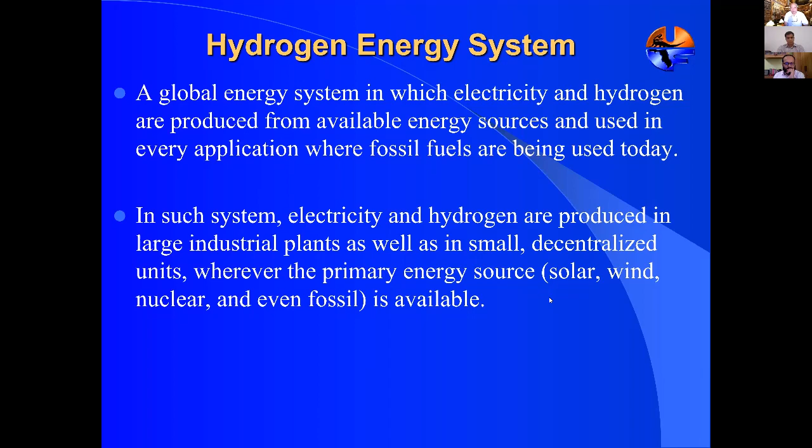Of course, clean hydrogen or green hydrogen is where you would use solar or wind as alternative energy sources to produce hydrogen. Hydrogen is considered to be an energy carrier, not an energy source, and that's an important point to make. This is what essentially a hydrogen energy system looks like.

You produce electricity, you transport electricity from the source to the final destination, and you can also use electricity to electrolyze water to produce hydrogen, and then you can transfer hydrogen in pipelines and use it for all kinds of applications, chemical, industrial, domestic, and so forth. You can also use it for transportation, especially when you are using either compressed hydrogen or liquefied hydrogen in cars and vehicles.

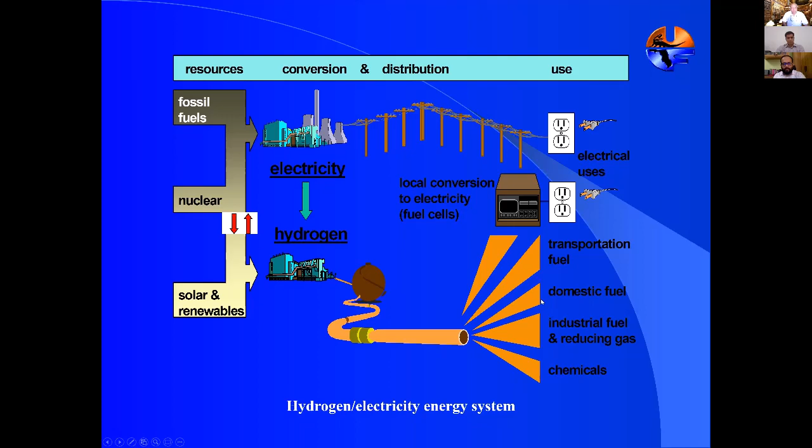In the United States, actually, I am very pleasantly surprised in some ways over the past couple of years to see this big, huge push towards hydrogen. This week happens to be what we call Hydrogen and Fuel Cell Week, which is October 4th through 8th, 2021. So we are in the middle of it.

They actually selected October 8th to be a very special day, because October is the 10th month, and 8, that would give you 1.008, which is the atomic weight of hydrogen. So 10/08 is the date, and 1.008 is the atomic weight of hydrogen. They have selected that to be the Hydrogen and Fuel Cell Day. That's sort of symbolic to celebrate hydrogen and to highlight the role that it plays.

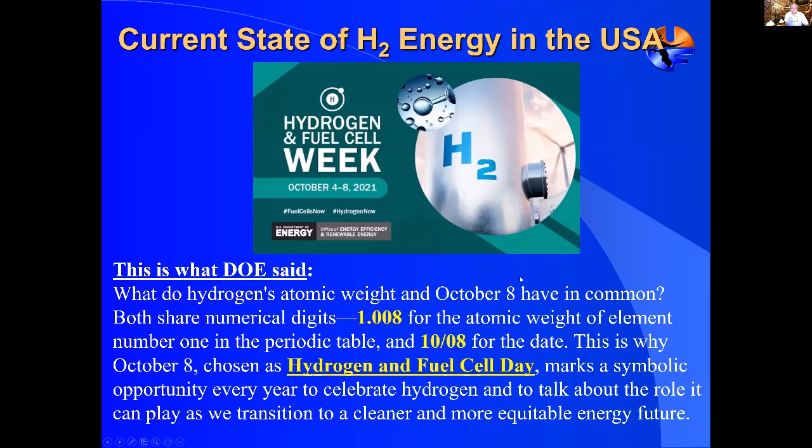So this is good, because this is led by the U.S. Department of Energy, and there is a big move in the U.S. Department of Energy to make hydrogen very important. In fact, I'll give you some small statistics here that go along with my point: we have 10 million metric tons of hydrogen produced annually in the U.S. We have 170 megawatts of electrolyzer capacity. This is being used to produce hydrogen from water.

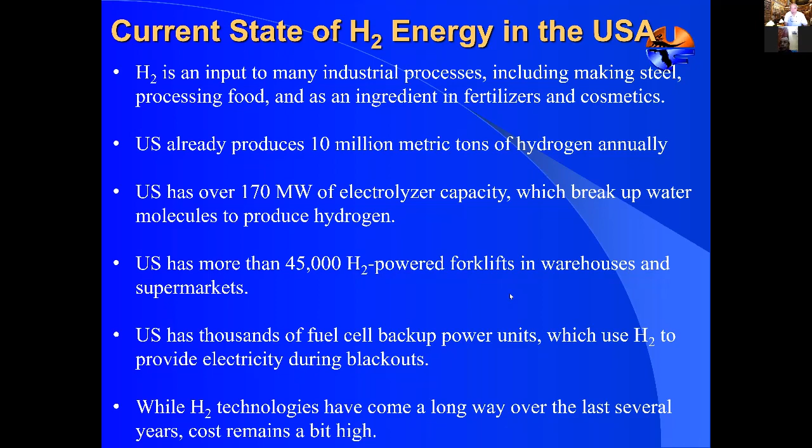45,000 hydrogen-powered forklifts in warehouses and supermarkets, and thousands of fuel cell backup power units that use hydrogen to provide electricity during blackouts. So this is all the good part. The not so good part is that it's still a little too expensive to produce hydrogen. So we're going to talk about that in a little bit, and I'll tell you what the target is for the U.S. Department of Energy.

They also have established a Hydrogen and Fuel Cell Technologies Office, which is a new office established recently. This office essentially coordinates hydrogen activities across the whole Department of Energy. It's working to bridge the gaps in technology, to unlock potential for clean hydrogen, to tackle hard to decarbonize sectors in the U.S. economy, to create job opportunities, to lift up communities, and to help the U.S. meet the climate goals of President Joe Biden.

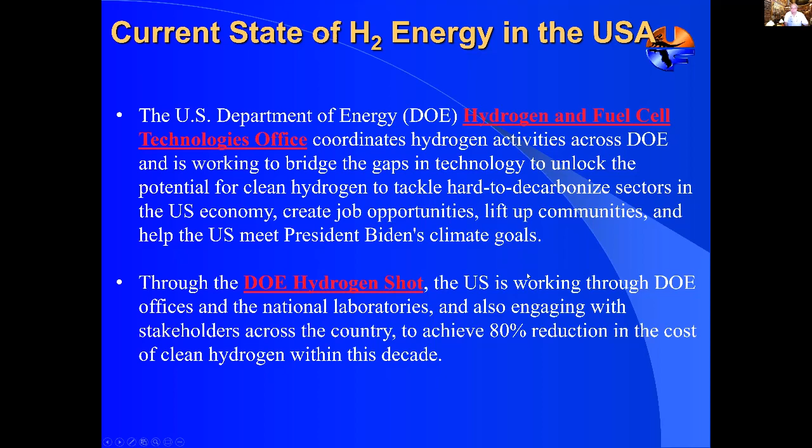Now, the National Renewable Energy Laboratory performed a study regarding medium and heavy duty vehicles. They did a study on the TCO, total cost of ownership, of medium and heavy duty vehicles, including not just hydrogen, but also all other conventional fuels like diesel. The medium and heavy duty vehicles currently account for 24% of the greenhouse emissions from the transportation sector in the United States. Therefore, if we're going to decarbonize the US economy, we're going to have to work on these vehicles because it's almost a quarter of the greenhouse gas emissions.

Now, these vehicles, for good or bad, are heavier and used more heavily than personal cars. On average, you expect commercial Class 8 tractors to travel over 100,000 miles per year. The commercial vehicles are extremely heavy. They can range from 14,000 pounds for the Class 4 delivery vehicles up to 80,000 pounds for the Class 8 delivery vehicles or tractors.

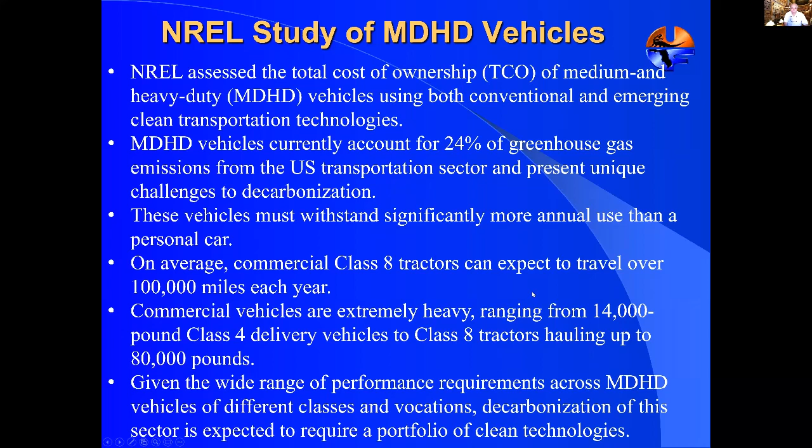The study also described the total cost of ownership of Class 4 and 8 trucks powered by diesel and natural gas and batteries and hybrid batteries and diesel systems, and of course, using hydrogen and fuel cells. They made a prediction of what the technology is going to look like in 2025 and in 2050 when they did this study.

The analysis that they performed was involving stakeholders everywhere, and is really considered the first account to calculate the indirect cost of what they call powertrains, in order to basically provide this information on the different market segments, so that we know how much money we're really dealing with in this particular part of the transportation sector.

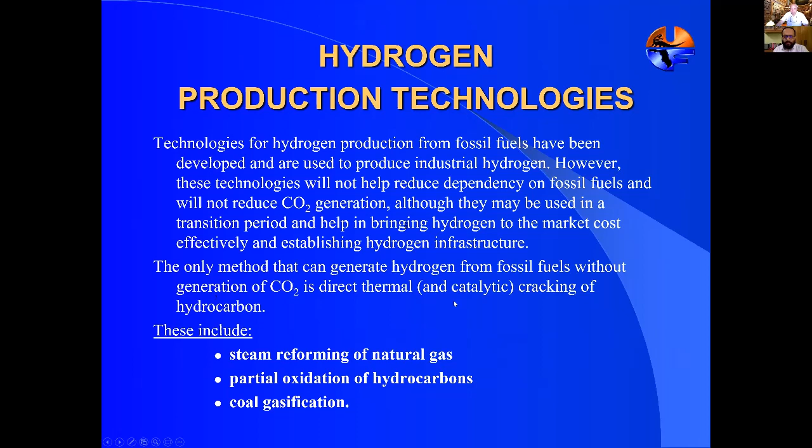So I'm going to stop here. I think this is probably a good stopping point. I have many other slides I can talk to you about, but for now, this would be my presentation, and then we'll hopefully answer your questions at some point.

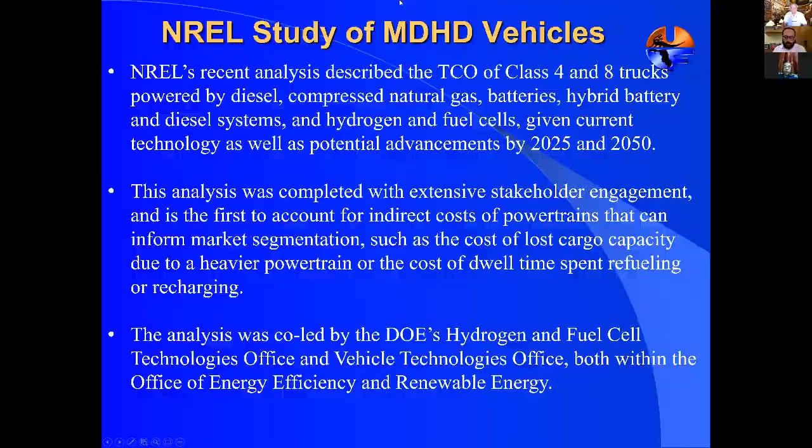Thank you, Dr. Sherif. You've clearly given us a snapshot into the current state of hydrogen energy in the United States, and also shared perspective in terms of how hydrogen is being approached for medium duty and heavy duty vehicles in the United States. I would now like to invite Professor L.M. Das, Dr. L.M. Das, for your initial comments, sir, and your quick presentation.

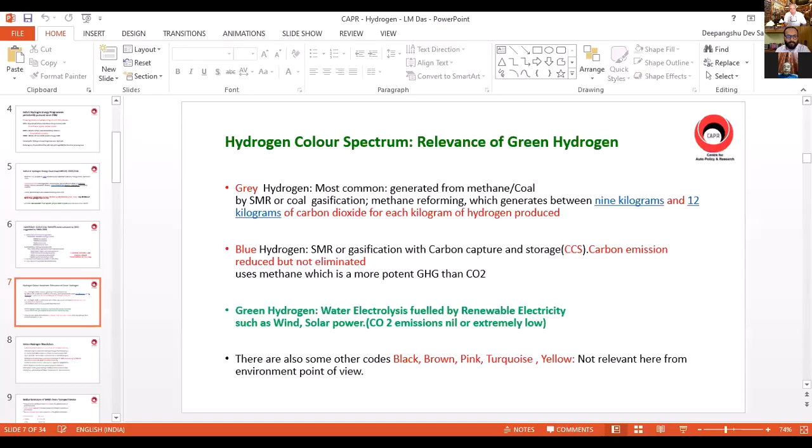I'll be talking about hydrogen, and I'll be talking about the application of hydrogen. Hydrogen is a fuel which is known to us for many years. Next slide, please. No, the other slide, please. It's not a radically new concept.

As you know, the famous science fiction writer, French writer Jules Verne, had also thought of hydrogen more than 150 years ago, from the energy crisis or the fuel starvation point of view. In one of his novels, Mysterious Island, he gives a very lifelike picture: a group of people are going in a ship. Suddenly it appears that there is no fuel to propel the ship further. What do you do? Another person in the ship says, let us derive some power, some energy out of this vast mass of water and propel the ship further.

So that means the visionary had thought of hydrogen as a fuel from the energy crisis or the fuel starvation point of view. The entire dimension of the problem has taken a new turn right now because of environmental degradation. It is usually said, we have not inherited this planet from our ancestors, we have taken it on loan from our future generations. So it is our moral duty to hand over a livable planet to the next generation. And here comes the environmental degradation.

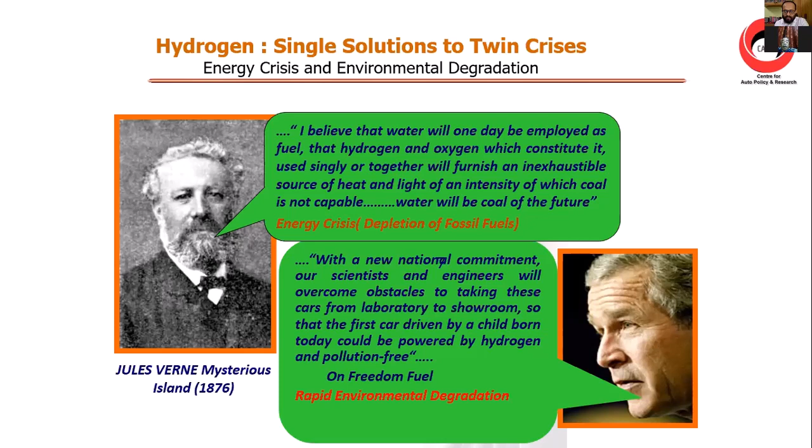George Bush, when he was the president of the United States, declared hydrogen as the freedom fuel. Freedom in the sense of freedom from energy crisis and freedom from the monopoly of the oil producing countries. Next slide, please.

As you know, right now there is an unprecedented global shift towards decarbonization, primarily because a man in the street knows what is global warming, what is greenhouse gas emission, how the ice cap is melting in the polar region. All these things are known to a common man in the street. So it is very important that hydrogen receives the attention it deserves.

There have been many ups and downs. Hydrogen has been tried out several times. Even during the World War days, Germans tried hydrogen very rigorously; they even went up to the technology of hydrogen injected engines, which were destroyed in the bombing. But right now, many countries have developed their goal-oriented, mission-oriented, time-bound plans for hydrogen, what to achieve by what point of time.

There have been many joint programs between several countries on different aspects of hydrogen, and integrated hydrogen systems consist of production, storage, utilization, and all that. And all these things are being tried out. I think these are some common aspects on which I'll not spend much time. The next slide, please.

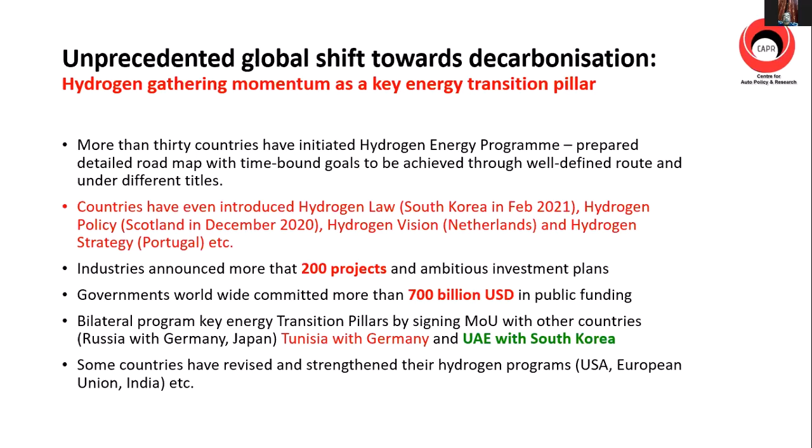India's hydrogen program: India thought of hydrogen much before George Bush talked of the freedom fuel. In 1982, the Department of Non-Conventional Energy Sources, which was a part of the Ministry of Science and Technology, had got the hydrogen program, and they had given a project to IIT Delhi in 1982, in which we tried on some engines initially. Subsequently, the department was graduated to a full-fledged Ministry of Non-Conventional Energy Sources, a unique ministry in the entire world.

And they put a lot of emphasis on hydrogen energy. A roadmap was prepared with people from the oil industries, the automobile industries, academia and the government. Mr. Ratan Tata was involved in the preparation of this map. A very ambitious project was given to the idea of hydrogen being used in the auto sector. Then the Ministry of Non-Conventional Energy Sources changed its name to the Ministry of New and Renewable Energy, where the work is being tried out with a renewed spirit of interest right now. Next slide, please.

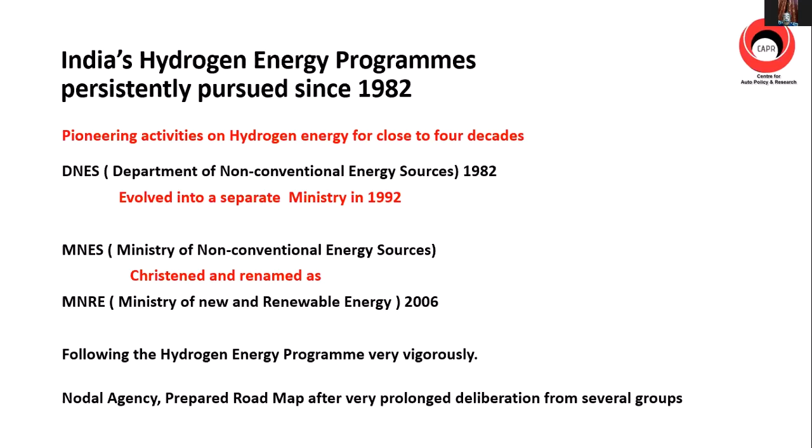So the National Hydrogen Energy Roadmap, as I said, was prepared from 2003 to 2006, with inputs from the oil industry, automobile industry, academic institutes, and the government. A very ambitious roadmap was prepared, which was approved in 2006, and then in 2016 they looked at the map again and revised it. All these are available on the internet, so I need not go into details. What I'm trying to say is that India has been a pioneering country in hydrogen pursuits, the objectives have been ascertained at different points of time, and the goals have been revised.

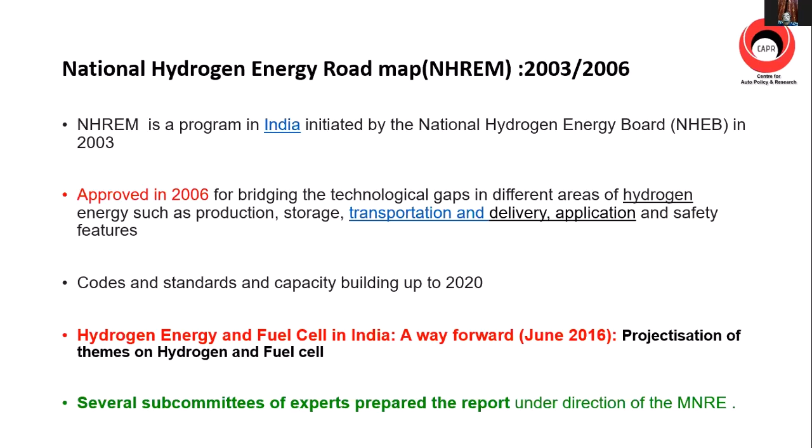And right now, you might have read in the newspaper today, the government has told the oil companies, Indian Oil, BPCL, HPCL, and GAIL, to come forward with a hydrogen production program by the end of this month. This shows the surge of interest in this country to go to an environment-friendly atmosphere for the common man. Next slide, please.

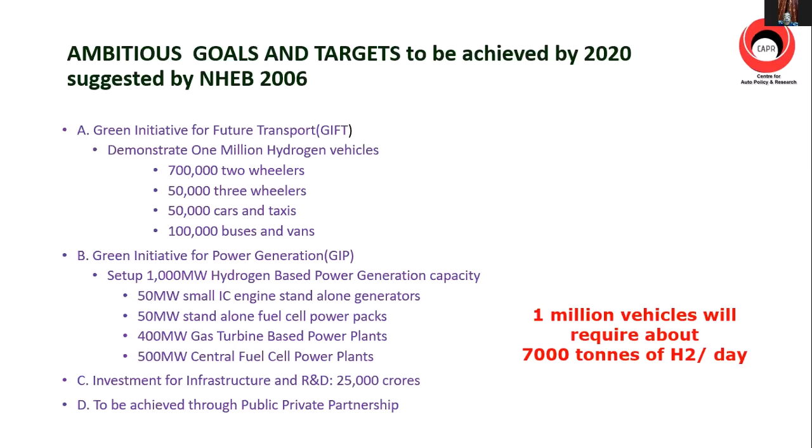So this is a very ambitious goal. I remember at one of the World Hydrogen Energy Conferences where I projected it, there were lots of questions about how India could have 1 million vehicles by 2020. This is the roadmap that was prepared. It is always better to gaze at the stars, to have some apparently unreachable goal, so that you put in your efforts and whatever you achieve will be substantial. And this is what has happened in this country. Next slide, please.

The color spectrum of hydrogen is very important: gray, blue, green, and there are others like pink and yellow. These are all textual information; I'll not go into it. I'd just like to say there's a lot of emphasis on green hydrogen. That means the production of hydrogen should be environmentally compatible. If producing hydrogen is energy intensive and environmentally not compatible, it will not be accepted. So green hydrogen is the present thrust. Next slide, please.

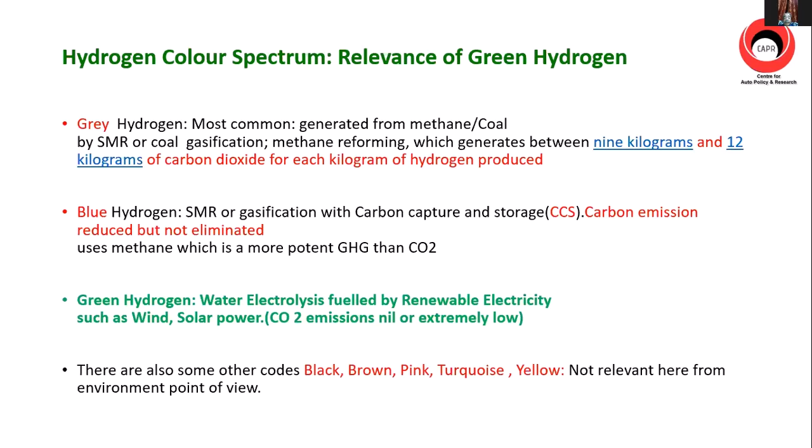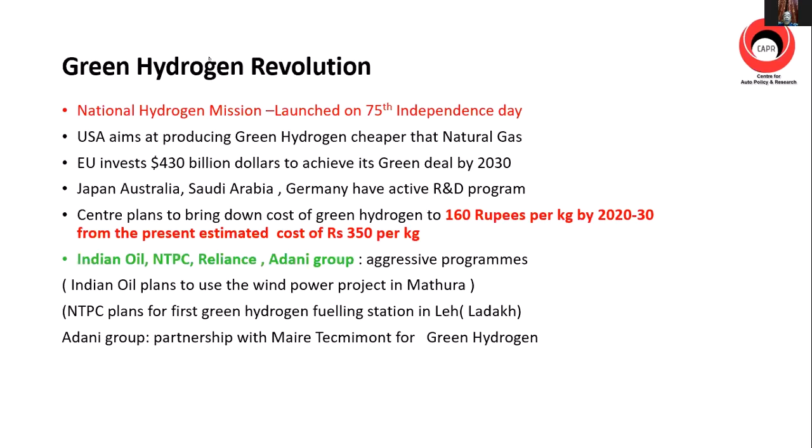So this is the green hydrogen revolution. As I said, many countries have already done this. The US has revised its program, the European Union has gone as a unit, and Japan, Australia, Saudi Arabia have all been trying. Indian Oil plans to use wind power for the Mathura refinery. NTPC has got a very big plan, and the Adani and Ambani groups have too. The unique feature in India right now is that the government, the industry, academia, and the common man are all contributing significantly to the hydrogen energy program. Next slide, please.

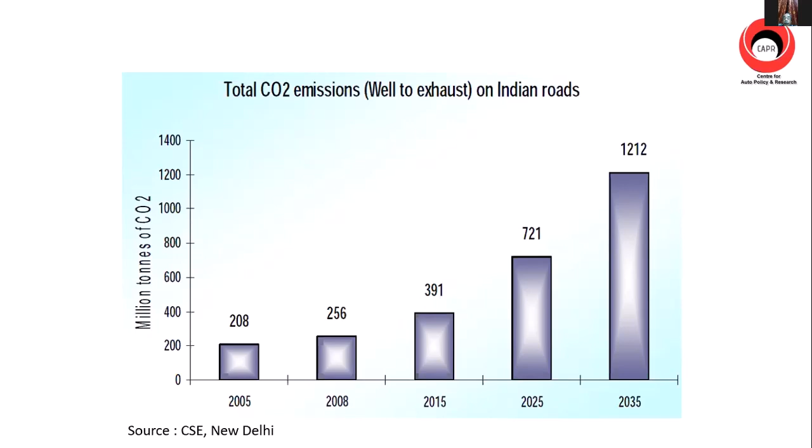Dr. T.N. Veziroglu did a study at the University of Miami, and he showed how hydrogen energy is building up, how fossil fuel energy is diminishing and hydrogen is going up. This is a study which was carried out with lots of practical data and modeling.

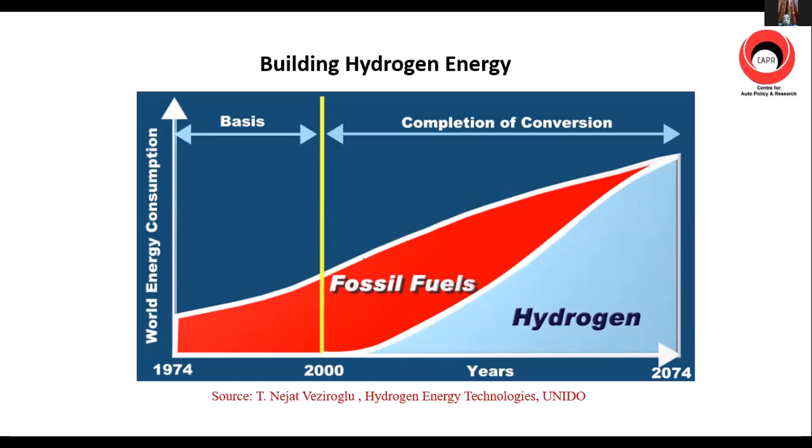Next slide, please. Next slide.

Hydrogen is the alchemist's dream because you get it from water, and upon combustion, it gives out water. It can be derived from literally all sources. You can get it from solar energy, from wind energy, from water, from geothermal, from biomass, literally everything. The technologies are different, obviously. For the production of hydrogen, there is an infinite source potential with an ability to provide almost zero emission.

So this is a broad investigation of engine strategy, which is very important because in the transport sector, the main culprit is the internal combustion engine right now. And internal combustion engines, as all of you are aware, are of two types: spark ignition and compression ignition. So there are several types of studies that have to be made: the performance, the emission, the combustion, the lubrication studies, the endurance test. All these aspects are to be very rigorously investigated before building up an engine for the transport sector. Next slide, please.

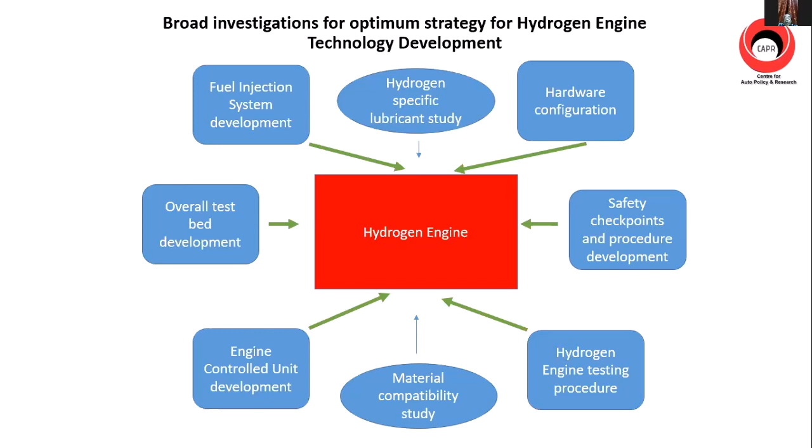Backfire has been the Achilles heel of the hydrogen engine. Because of the low ignition energy and high flame speed, sometimes, if there is a hotspot, a concentrated source of thermal energy, it inadvertently acts like a spark plug, and the flame propagates back into the manifold. And that is precisely why hydrogen energy research could not be continued and got restricted to laboratory curiosity only. And all these positive features of hydrogen were clouded by the single culprit, backfire.

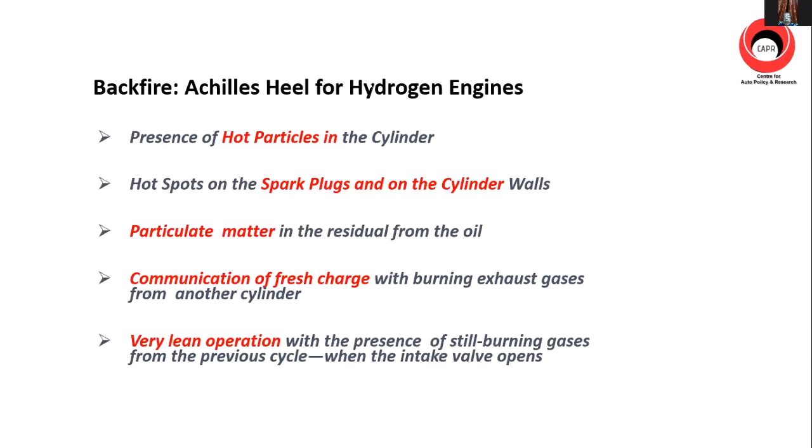But now backfire has been very thoroughly investigated, and the steps to be adopted to get rid of backfire have also been identified. Next slide, please.

We in IIT Delhi carried out long-term work, and the induction of fuel, the introduction of fuel into the hydrogen engine or hydrogen vehicle, is the crux of the technology. You cannot have a carbureted system because backfire will not be eliminated by that. As you know, the hydrogen flame is invisible, it has a very high flame speed, and it needs minimum ignition energy. So once the flame propagates back into the manifold, it ends up in an explosion.

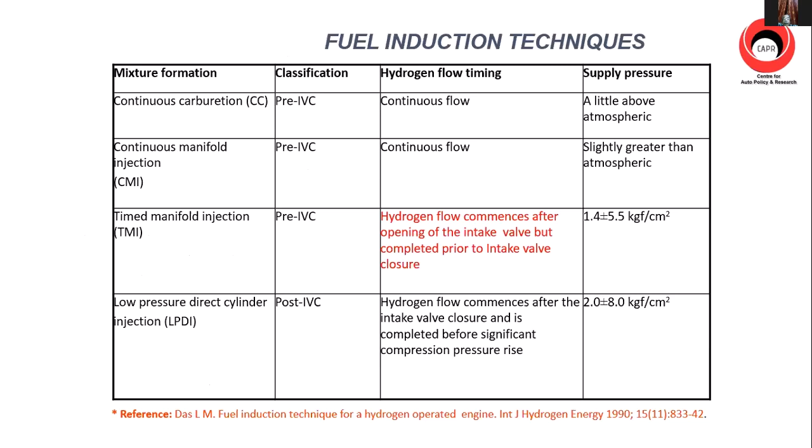At the University of Oklahoma, at one point of time, some projects given by the Department of Energy, United States, were discontinued because they were not able to identify the cause of backfire. In IIT Delhi, we carried out a series. This particular table reflects the work of several years in which how to introduce hydrogen into the engine was finally optimized, and timed manifold injection was important because you introduce hydrogen at a point into the manifold when it doesn't come in contact with air. I think these technological aspects are very well given in the literature right now. Next slide.

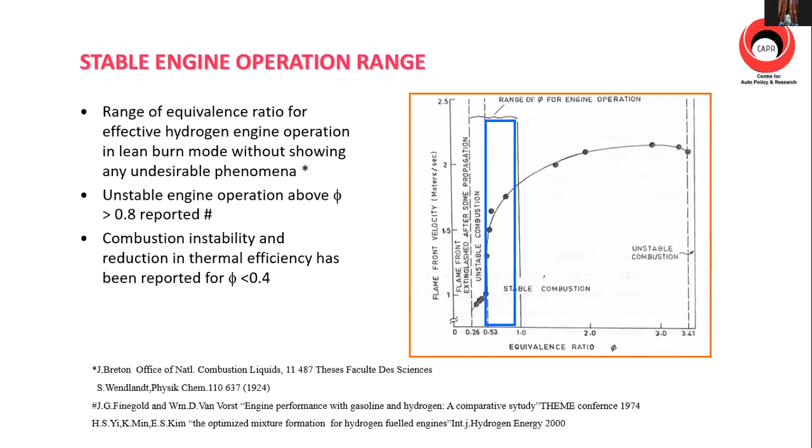It's almost axiomatic that a good fuel for a petrol engine is a bad fuel for a diesel engine because of the radically different combustion characteristics. Hydrogen is a good fuel for the spark ignition engine, but it is not the ideal fuel for the diesel engine because the auto ignition temperature of hydrogen is about 576 degrees centigrade.

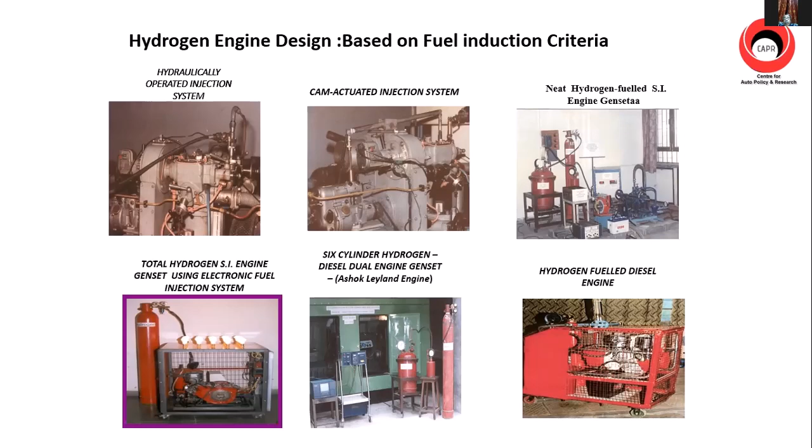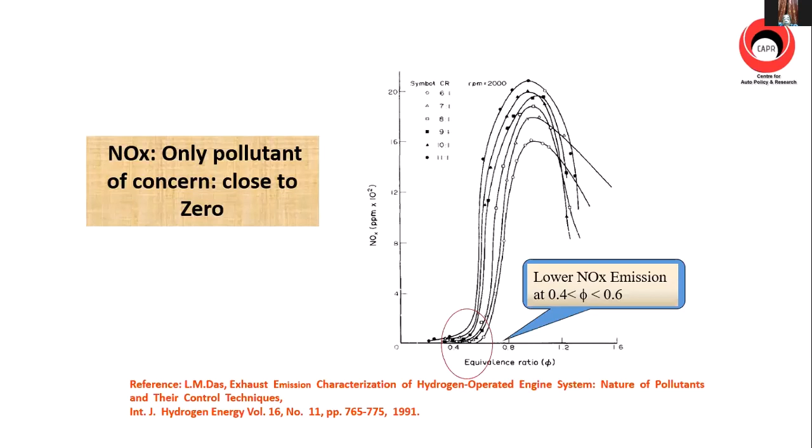The hydrogen engine embraces the benefits of both petrol and diesel engines. It can reach the compression ratio of a diesel engine, and we have been able to achieve a thermal efficiency of close to 44%, which is unthinkable for any spark ignition engine configuration running on petrol. This is possible because you can have unthrottled operation, so there is no pumping loss, and you can adopt a higher compression ratio to achieve this.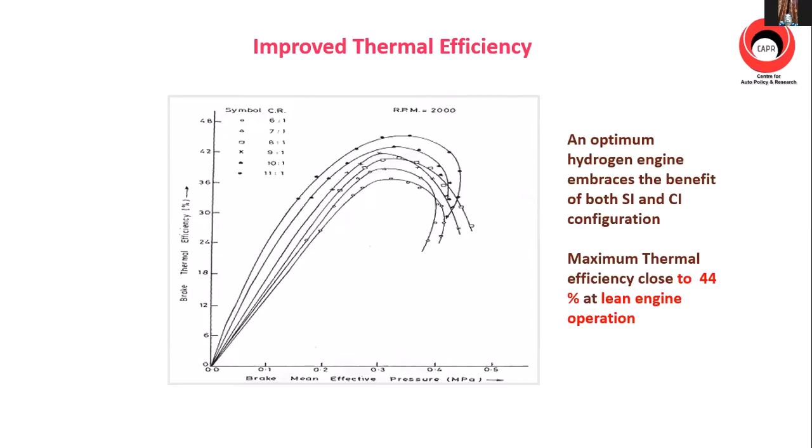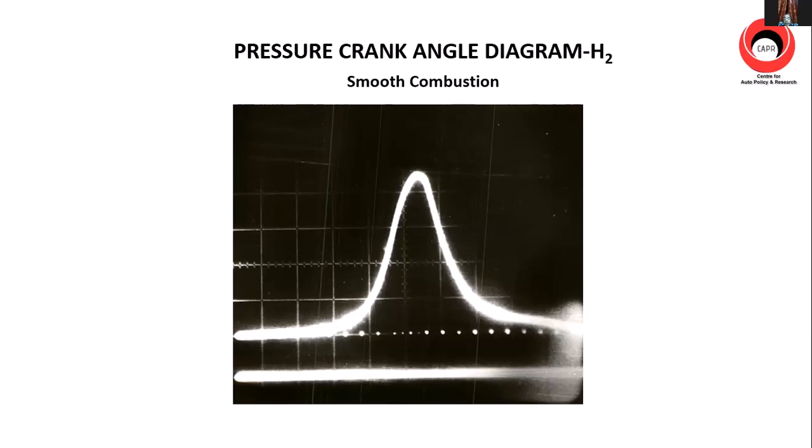So as I say, diesel engines are not suitable for hydrogen to be used as a neat fuel. So dual fuel operation is ideal.

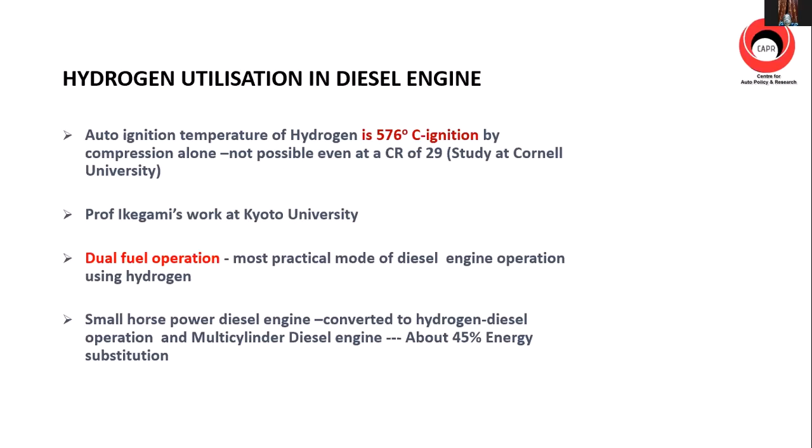Safety is something where, as you know, a known devil is better than an unknown angel. From many points of view, hydrogen is safer than gasoline. Professor Michael Swain of University of Miami got a multi-year project from the Department of Energy and carried out a lot of hydrogen engine safety activities. But hydrogen still couldn't get off the ground because of the stigma attached to it. The hydrogen bomb and the Hindenburg disaster attached such a stigma that if you talk of hydrogen to a man on the street, he looks at you with eyes wide open.

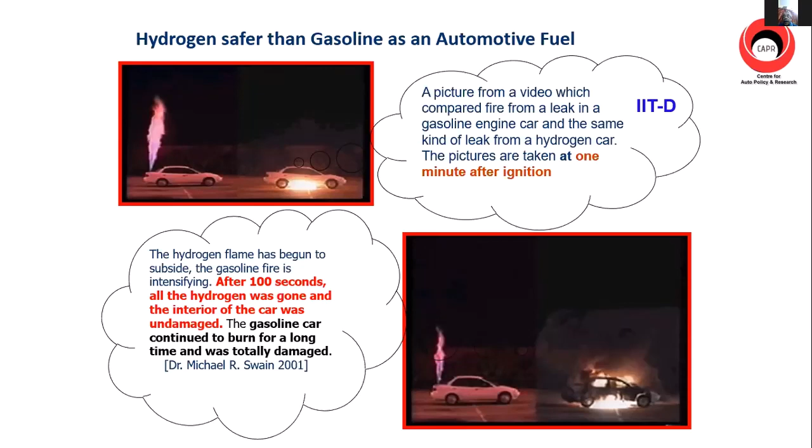After all this work in the laboratory, it was decided that the technology must be transferred to the field.

Professor Veziroglu, who happens to be the president of the International Association of Hydrogen Energy and editor-in-chief of the International Journal of Hydrogen Energy, and a retired professor of the University of Miami, visited India and took a look. He suggested, why don't we try to take this work into the field?

Luckily, at that point of time, there was a committee formed by Mr. Chidambaram, the principal scientific advisor to the Prime Minister, called the Core Group on Automotive Research. In that group, I projected my ideas, and this caught the fascination of Dr. Pawan Goenka, who suggested that IIT Delhi and Mahindra should take up a project to try applying hydrogen on auto vehicles.

So there was a proposal inviting projects from UNIDO and IIT Delhi. We submitted the proposal, and luckily it was accepted. At that point of time, I had also gone to the United States and given a talk, and Air Products appreciated my idea. It was a very opportunistic moment, a very good moment when industry and academia joined together. IIT Delhi, Mahindra and Air Products all worked together, from production to utilization of hydrogen.

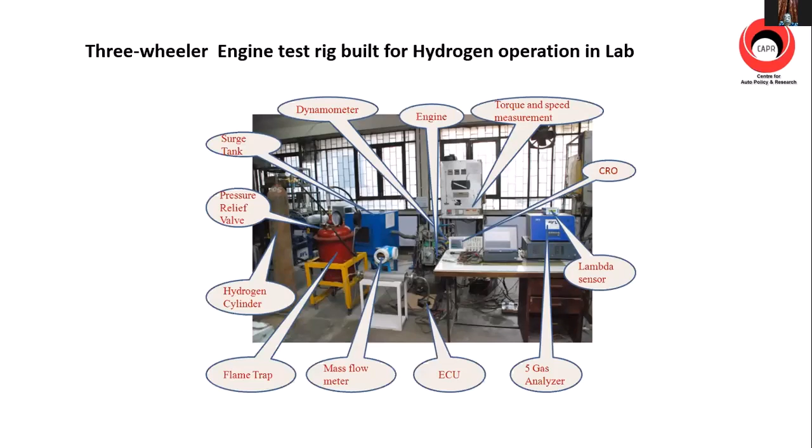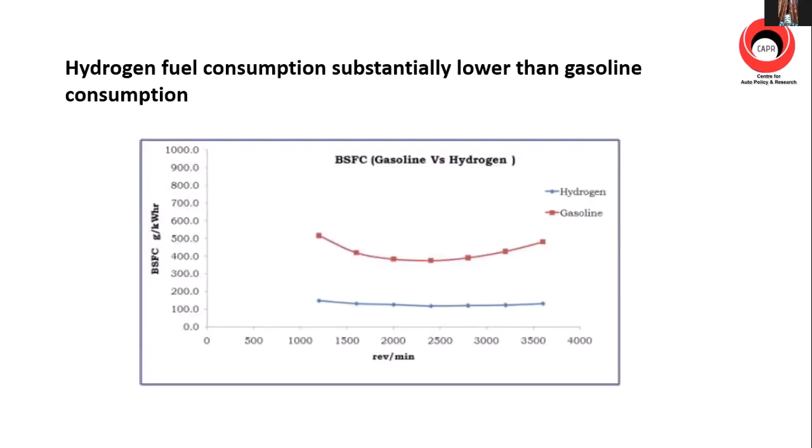So it's a matter of deep satisfaction to express that the three-wheeler of Mahindra and Mahindra, developed by the joint effort of IIT Delhi and the engine study, and subsequently tested by Mahindra on the road, could develop a system which had practically no emissions. Next slide, please.

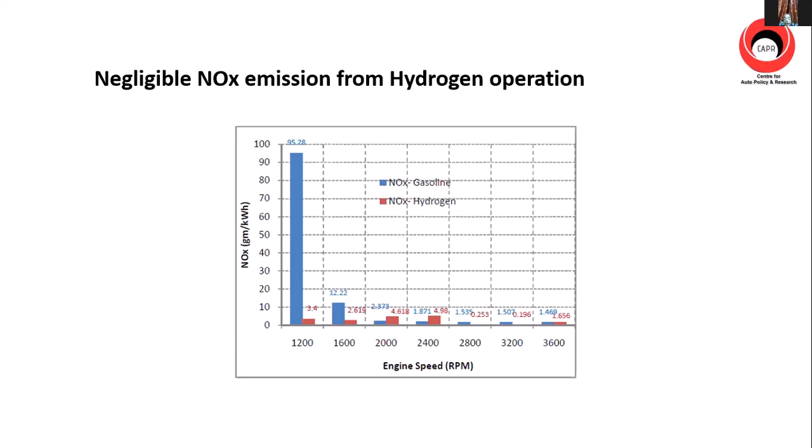So on 12th January, the three-wheelers were inaugurated. People from Mahindra, Air Products, IIT Delhi, and ITPO Pragati Maidan, where these vehicles are running, were all present at the inauguration.

Then subsequently, we were suggested by the Ministry of New and Renewable Energy to graduate this technology to a minibus development, again in joint collaboration with IIT Delhi and Mahindra. We did that—again the engine was installed at IIT Delhi and was optimized. Next slide, please.

It was installed in that engine, and we adopted several measures here, like exhaust gas recirculation, as we did before. Then we had some SCR catalytic converter—that means post-combustion control of oxides of nitrogen was also widely tested. Next slide, please.

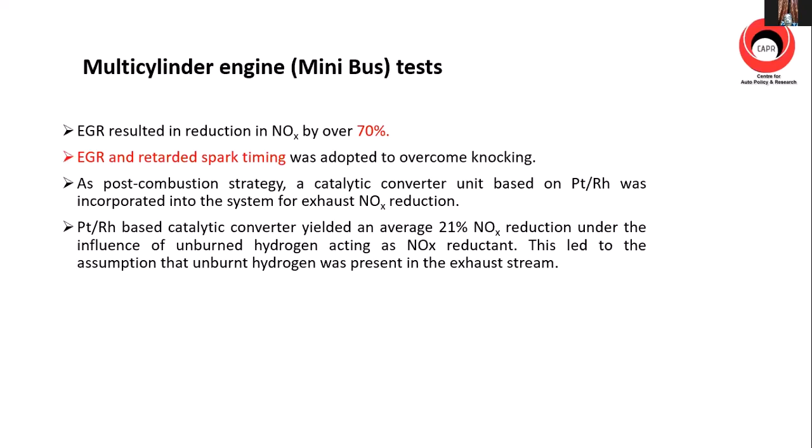So obviously, the way forward—I feel now everybody is aware of hydrogen. There should be lots of safety features further propagated to the field. There should be many workshops educating people, and I think a very optimal integration of academia, industry, and government should be there so that hydrogen can move forward.

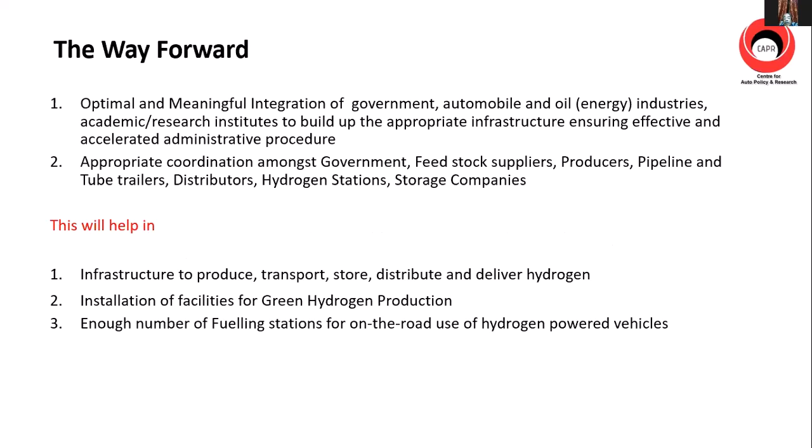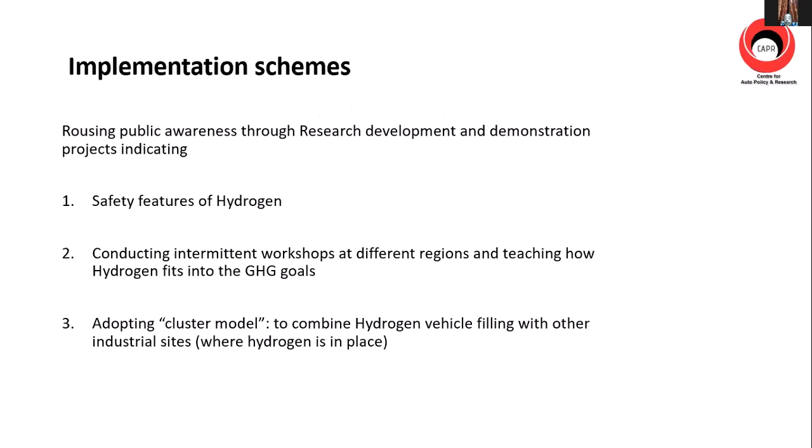Next slide, please. So this is the best way to have it, because the safety aspect has to be properly understood by the users. Then workshops should be conducted, and there should be a cluster model in which there should be facilities going from production to utilization.

Next slide, please. And as I say, it is high time to go for hydrogen. And in all research, I often quote Robert Frost, who says, 'Miles to go before I sleep.' Thank you so much.

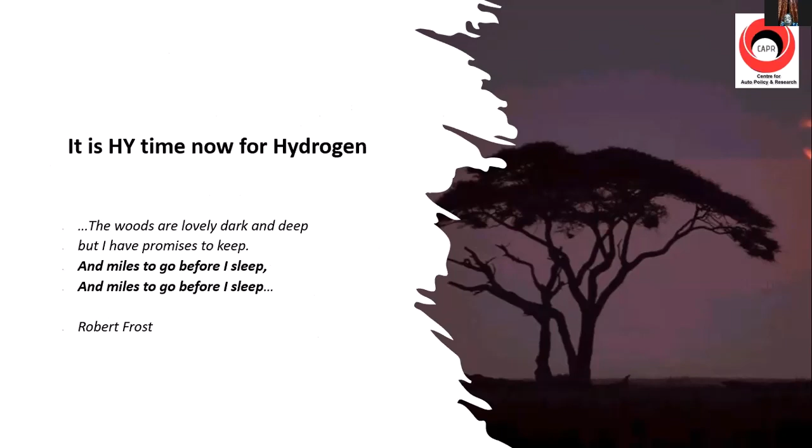Thank you, Professor Das, for that very detailed perspective on hydrogen as a technology, and for talking about the unprecedented global shift towards decarbonization and how hydrogen can play a role.